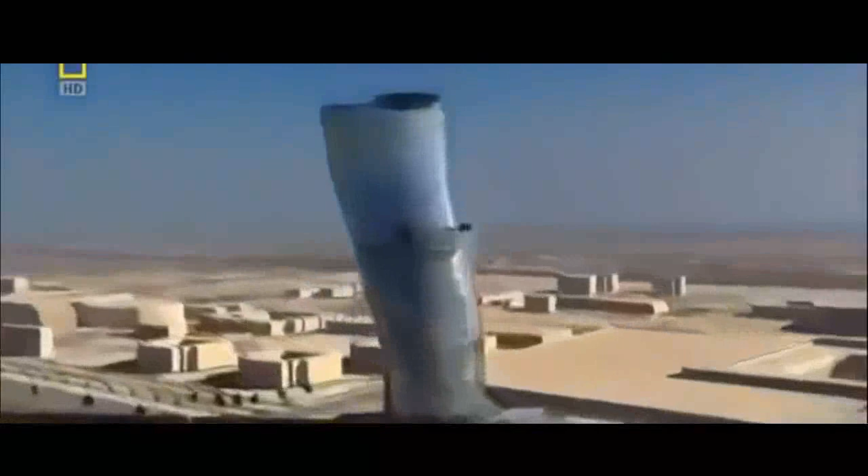To make it stand up, it'll take some extraordinary engineering that could rewrite the skyscraper rulebook.

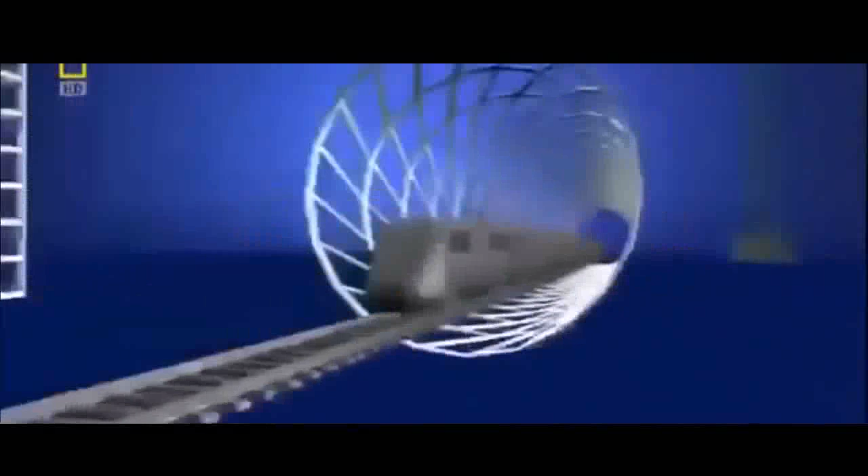Situated on the edge of the Persian Gulf lies the Sheikhdom of Abu Dhabi. It's the largest and richest of 7 states that unified in 1971 to form the United Arab Emirates. Abu Dhabi is undergoing one of the biggest makeovers of modern times.

Its ruler, Sheikh Khalifa bin Zayed Al Nahyan, wants to join the City Super League. And he's spending over $200 billion to transform his capital into a world-class business and tourist destination.

He's already spent a reputed $3 billion creating the most expensive hotel ever built. The Emirates Palace boasts 114 gold domes and is the height of luxury, where rooms cost up to $12,000 a night.

And that's not all. He's built one of the largest and most opulent mosques on Earth. Capable of accommodating 40,000 worshippers, the Grand Mosque boasts the largest carpet on the planet and the world's biggest gem-encrusted chandelier. But even these structures have not quenched his thirst for the extraordinary.

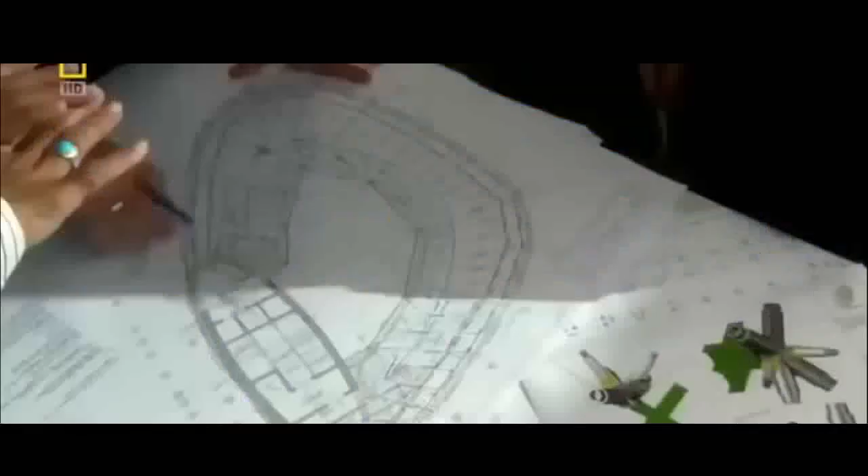It's a tough challenge. This is a land where extreme engineering is the norm. Neighboring Emirate Dubai has already built the world's tallest skyscraper, the 828-meter-high Burj Khalifa, and an iconic luxury hotel, the Burj Al Arab. Sheikh Khalifa signs up a team of architects and gives them a clear brief, not to go bigger or taller, but to challenge the rules of architecture.

For Neil van der Veen, one of the concept architects, it's a unique opportunity. The spirit of the times in the UAE was that anything was possible. Really, you could do anything. We can do something in the architecture that will represent that Abu Dhabi is right at the cutting edge.

The architects look for inspiration in Abu Dhabi's landscape. They find it in the windswept dunes and the rolling waves of the Persian Gulf. We took this idea of wind and water, which are both dynamic, fluid type of rhythms of nature, and we said, how can we capture those in time?

As a result, you get a much smoother facade. I was really very happy when we first saw it, because with such a building, you can get the first impression from the first few seconds.

The team come up with an extraordinary design. A tower that spirals out of the ground to 160 meters. Inspired by a desert whirlwind and the splash of a wave rising over the sand. This gravity-defying skyscraper tilts almost 5 times more than Italy's Leaning Tower of Pisa. No single angle of this tower is the same as another. It's a structure guaranteed to amaze.

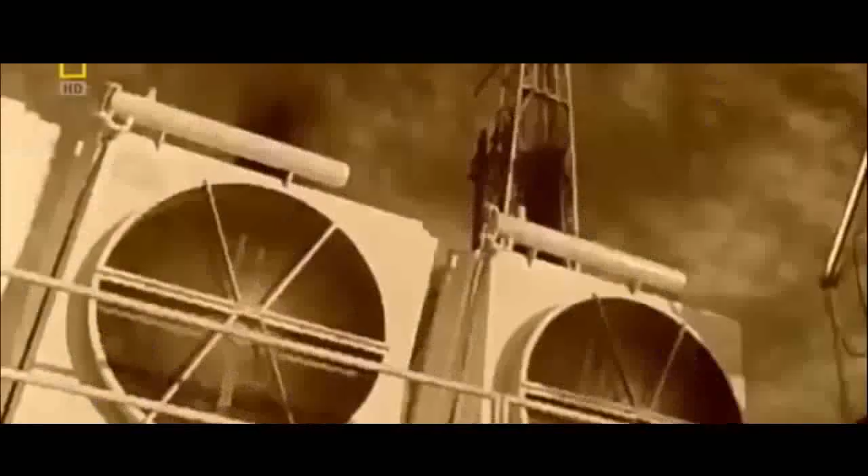Over the past 50 years, this land has experienced extreme change like no other. The discovery of huge oil reserves in 1958 set the wheels of progress in motion. Abu Dhabi's ruler, Sheikh Zayed, had a vision to unify the sheikhdoms and secure their financial future from Western dominance. He then set about using his black gold to create a city that rose out of the desert.

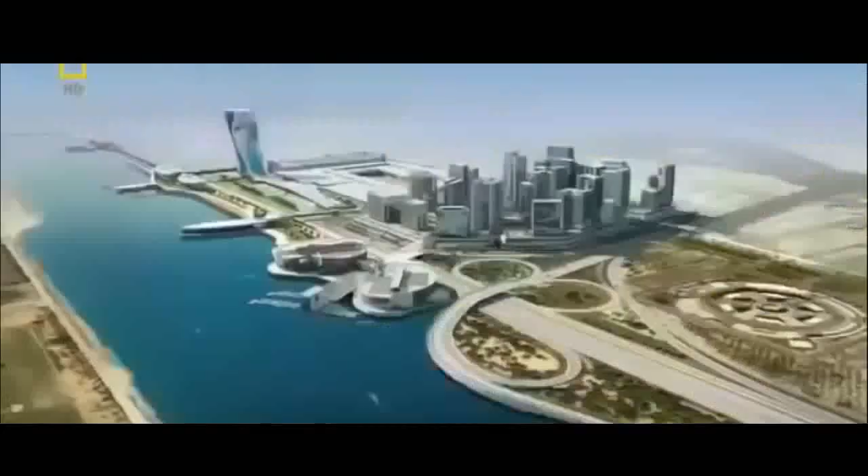Today, Zayed's legacy is all around, and now his son wants to leave one of his own. To transform Abu Dhabi once again, but this time to put it on the world map. Sheikh Khalifa plans a new $2 billion business district called the Capital Centre. Situated alongside the Middle East's largest business hub, the Abu Dhabi National Exhibition Centre. It's the ideal location for an architectural icon, and inspired by its location, the new tower is named Capital Gate.

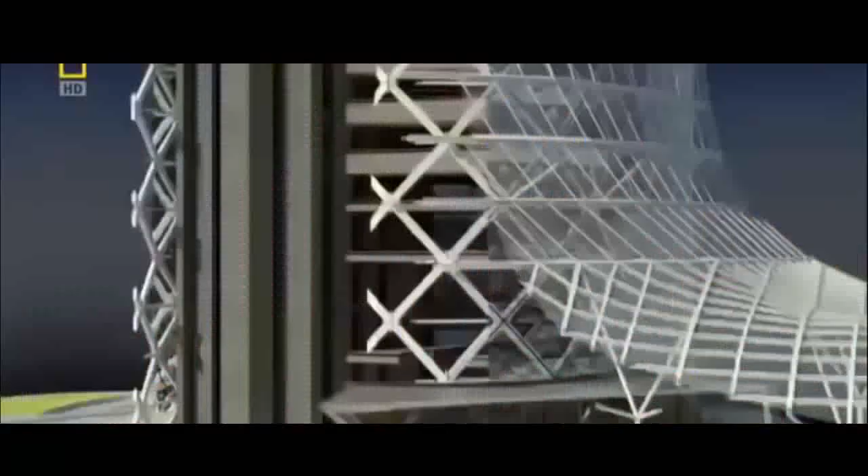Now, the idea must make the leap from the drawing board to the construction site. The only problem is, no one has ever attempted a skyscraper like this before. Everyone realized that this is a crazy structure to build, and how are we going to build it? To make Capital Gate's gravity-defying design a reality, it'll take some extraordinary engineering, and the challenge begins on day one. Its top floors overhang its base by 33 meters, creating huge forces that want to rip the building's foundations out of the ground.

At the construction site, project architect Tony Archibald is daunted by the task ahead. When I first joined the job, I was shown the drawings, and I kind of did a double take, and I wasn't quite sure that I got the correct understanding of the project, and it took me a few moments before I realized what we were about to undertake.

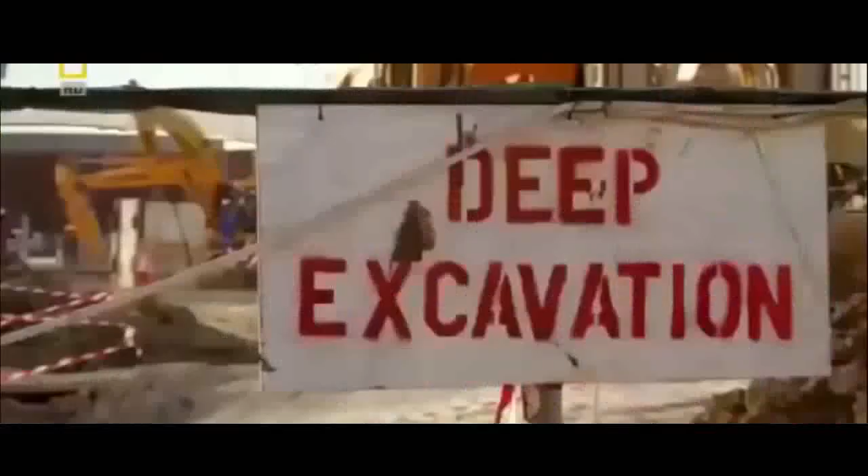Keeping Capital Gate upright is a huge engineering challenge. There isn't just one solution. To overcome the forces of gravity, it will take a whole range of pioneering techniques. But the task starts with the foundations deep underground. On one side of the building, the weight is going down into the ground. On the other side, it's being lifted out of the ground. And that's due to the large overhang that we're having to deal with.

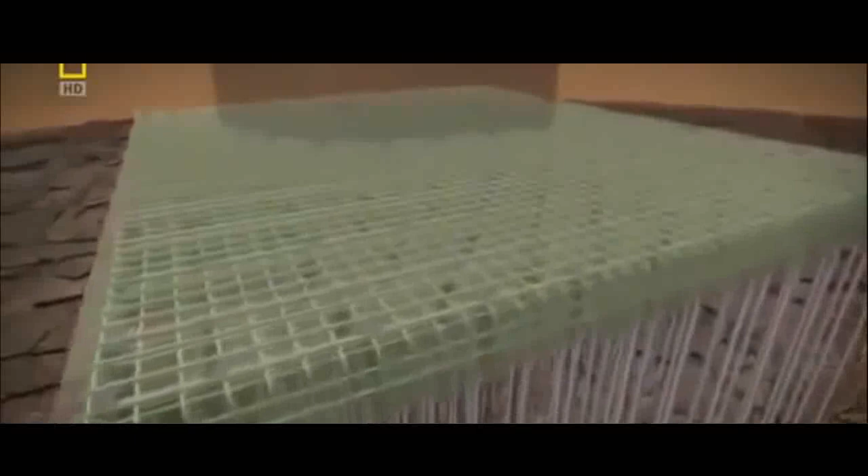The solution requires almost 400 concrete piles that work in 2 different ways. On the leaning side, half of the piles push the overhang's forces into the ground. On the opposite side, the remaining piles anchor deeper into the bedrock. They resist the stretching forces trying to wrench the building out of the ground. Finally, to evenly distribute Capital Gate's forces into the piles, a deep concrete slab reinforced with steel is laid on top. What the foundations taught us is that every single aspect of this building has to be custom engineered.

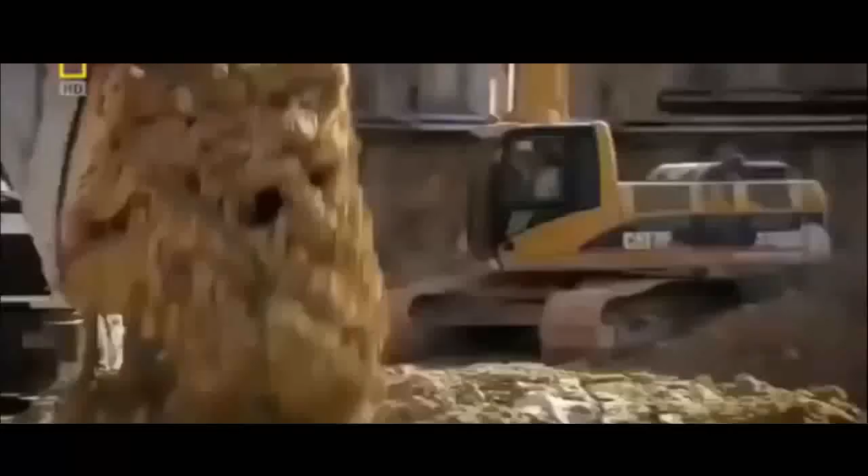Excavators dig out a colossal 6,000 cubic meters of sand. And over 8 weeks, hundreds of piles are driven into the ground. We had an awful lot of piles to put in a very close proximity. It was a real difficult challenge. There can be no let-up on this schedule. Sheikh Sultan wants Capital Gate complete by an impossibly tight deadline.

With the foundations finished, building above ground can begin. But because of the dramatic lean, it will have to be constructed in a very different way to a conventional skyscraper. We realized once we'd done the foundations that this was going to be the first of many difficult problems. A normal skyscraper requires a solid core to hold it upright. But Capital Gate's curves will just crack and topple a standard core. Engineers must discard conventional thinking and devise a way to defy gravity.

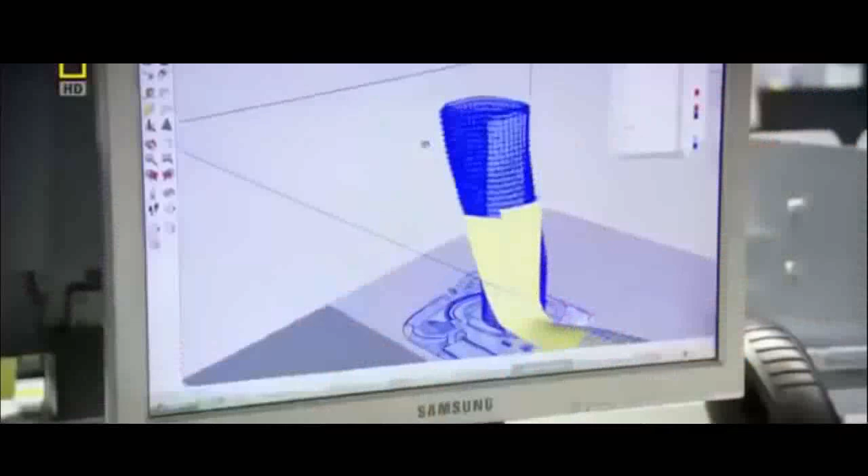Inspired by the nearby desert landscape and its wind-shaped dunes, architects have designed a curved leaning tower. But it'll take some audacious engineering to stop Capital Gate from falling over. Normal skyscrapers are built around a slim vertical core, which helps to channel the building's weight into the ground. There's so much overhang on this building that a conventional core was no way going to work. You just can't build a straight core. It's just not strong enough. Capital Gate's design would cause a conventional core to bend dangerously. The pull of the massive overhang wants to stretch the core on one side, causing the concrete to tear apart.

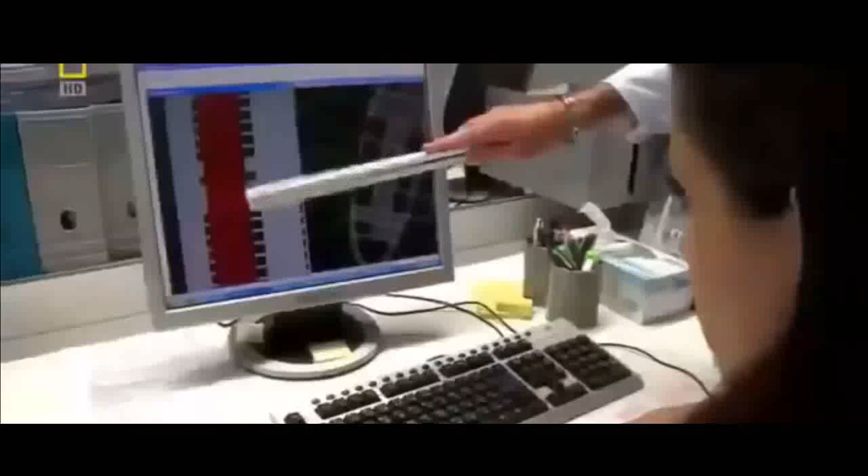Structural engineer Mona Vasi knows it's a serious problem that must be solved. When I saw this one, I thought it's impossible, it's not going to work. It's just some sketch, somebody left it somewhere. But I always think that for the architects, it's easier for them to just draw something, but it's not easy for us to fulfill or satisfy their need.

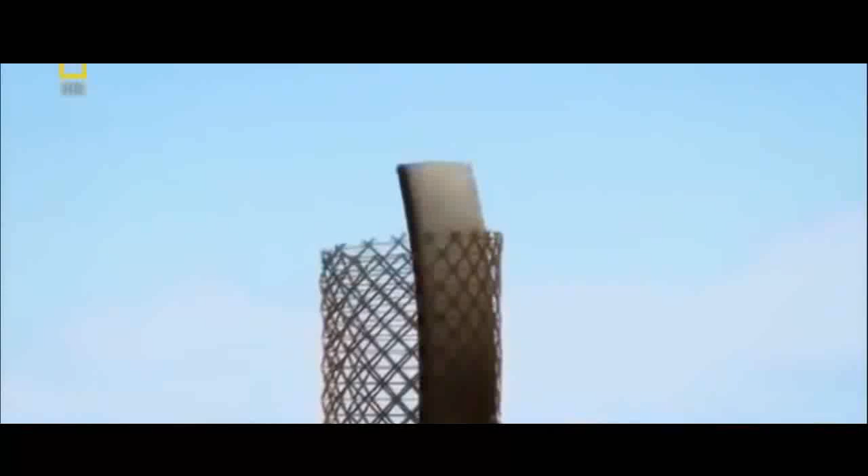The engineers developed two groundbreaking solutions. The first part of their plan is to build the core with a curve, bending in the opposite direction to the building's lean. As the structure grows, its weight pulls the core straight. In total, it shifts 350 millimeters, and the effect is significant. The concrete that would have been stretched by the overhang's pull will now be compressed and strengthened. You build it bent, and then as you add the slabs to the upper levels, it pulls it back into vertical. So basically that whole vertical core is in compression, and that gives it immense strength.

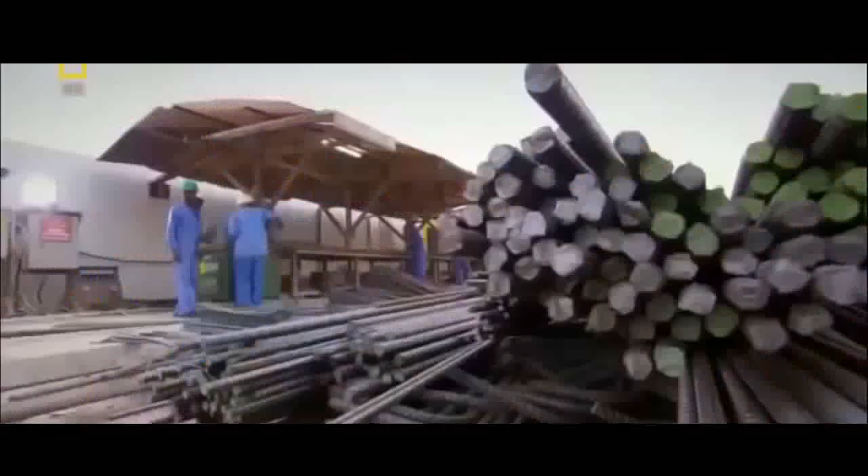The core grows 4 meters a week, and construction manager Les Fairchild is in charge of building it. This is probably the most complex core that I've come across. It's built at an angle, and effectively the core holds the whole building up. The core is built using a technique called jump forming.

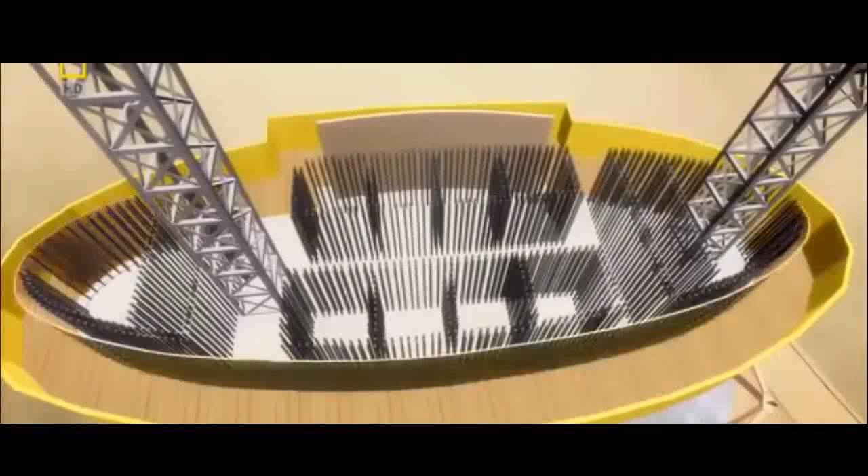First, a dense mesh of steel reinforcement is assembled. A mold then closes around the steel to form the shape of the core. The steel mesh is then filled with concrete. Then the mold or form can climb up the core wall for the process to start all over again. Jump form is a hydraulic platform. Once we've cast each 4-metre level, we simply attach it to some runners and we jump it hydraulically up to the next level.

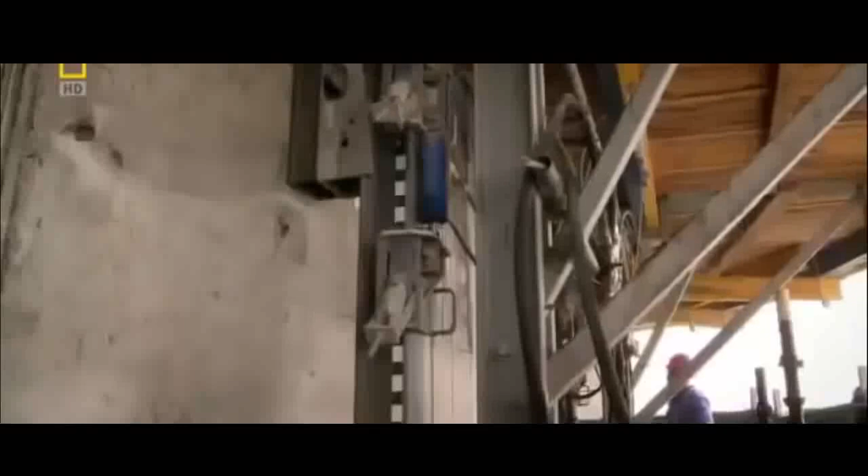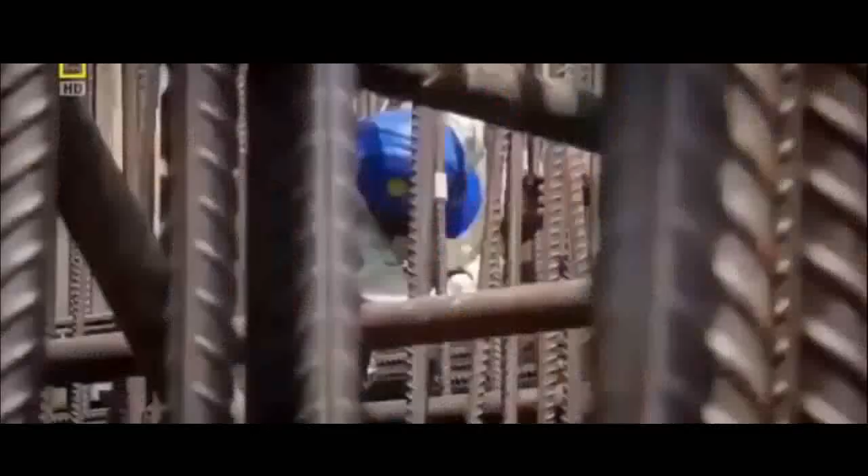The core will be strengthened as it straightens. But for the core to carry extreme loads, the concrete must be reinforced using steel rods called rebar. The rebar is installed during the daytime, but temperatures of up to 50 degrees Celsius and concrete don't mix. It dries too fast and could crack. To set at the right speed, the concrete has to be poured during the cool of the night.

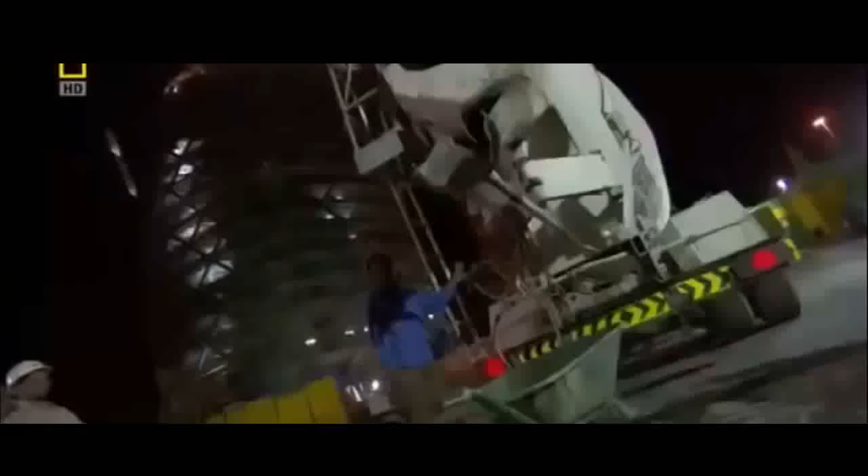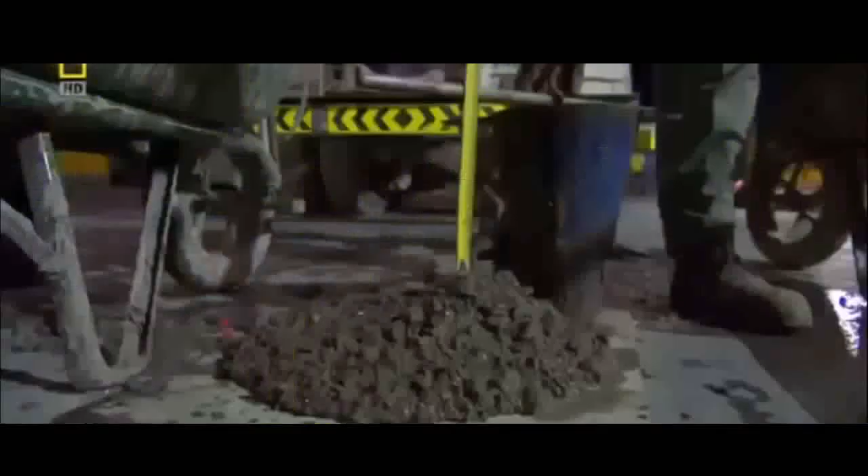As the core grows higher, the liquid concrete has to be pumped over longer and longer distances. So the consistency of every batch is first checked in a slump test to ensure it won't block the pipes. When you first see it coming out the wagon, you can usually tell whether it's a tight mix or a loose mix, and that's what we're testing for really in the slump test. We simply make a cone, lift the cone off, and depending on how much it reduces in height, tells you exactly what the slump is. The one we just witnessed is 215 millimetres, which is within the specification, so that's good to go.

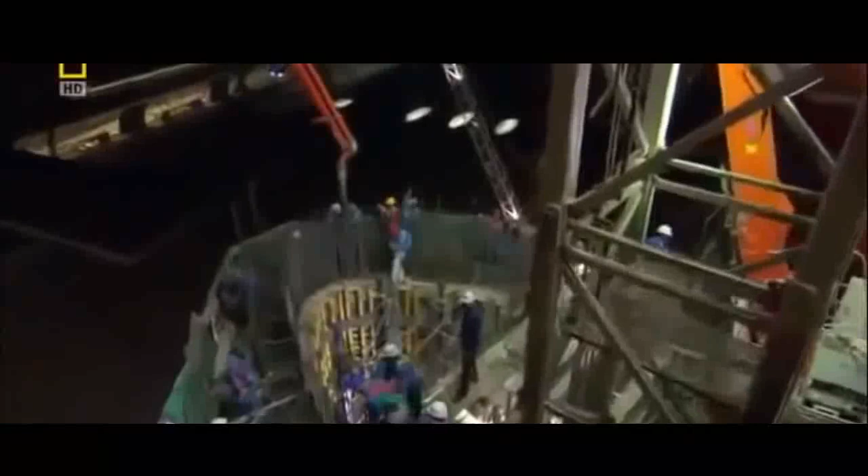Whilst the truck drives to the pump, Fairchild needs to get onto the core. He can take the stairs, but 90 metres up is a long climb. He knows a much faster way. Crane lift. It's going fairly well. We've had a nice continuous supply of concrete, and we're now pumping it up to the upper levels of the building. And the lads are just steadily working away. They actually work from one side to the other in metre deep layers, so they're doing everything right. It's always exciting when we pour concrete. It means it's another achievement really. We're going up another level.

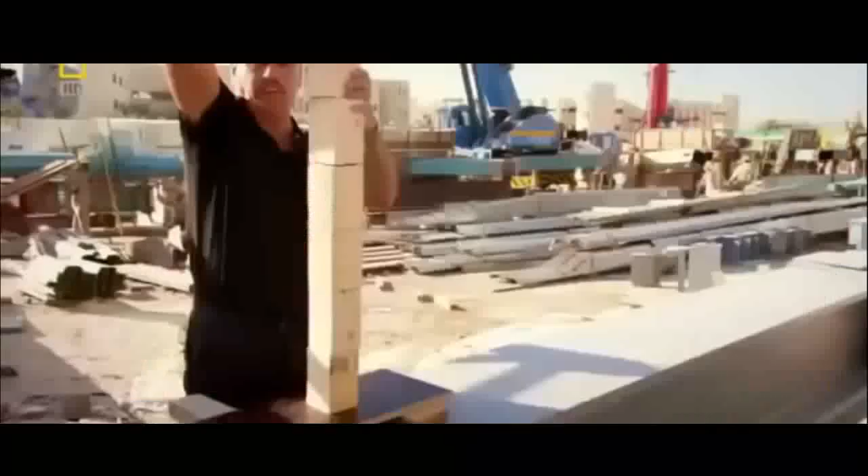But building the core out of alignment and packing it with rebar still isn't enough to stop gravity toppling Capital Gate. What we came up with is a post-tensioning solution where we introduced much more reinforcement into the core wall and then used the tensioning process. Basically that was done by introducing high tensile strands to the centre of the walls. When we reach the designated height, we simply apply tension. We're actually stretching the tendons that fall through the wall and pulling them tight, and that's done by a tensioning machine. So effectively, when the tension is complete and the load was applied, the core would stay intact, and the additional reinforcement would prevent it from falling over.

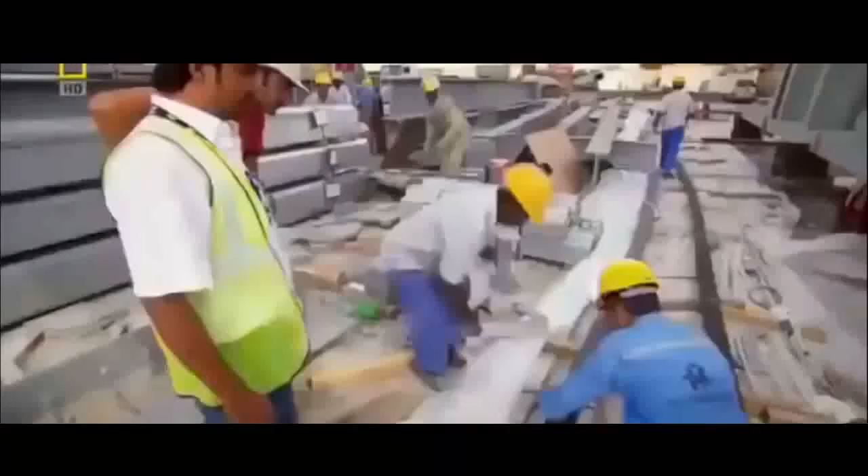To post-tension the core, 146 steel tendons are threaded vertically through the concrete. Each tendon is 20 metres long and runs through 5 floors of the building, overlapping each other for maximum strength. When the tendons are stretched, the stress counteracts the pulling force created by the massive overhang, stopping the concrete from tearing apart. On site, the team are post-tensioning the core. But no one has ever attempted this vertically in a skyscraper.

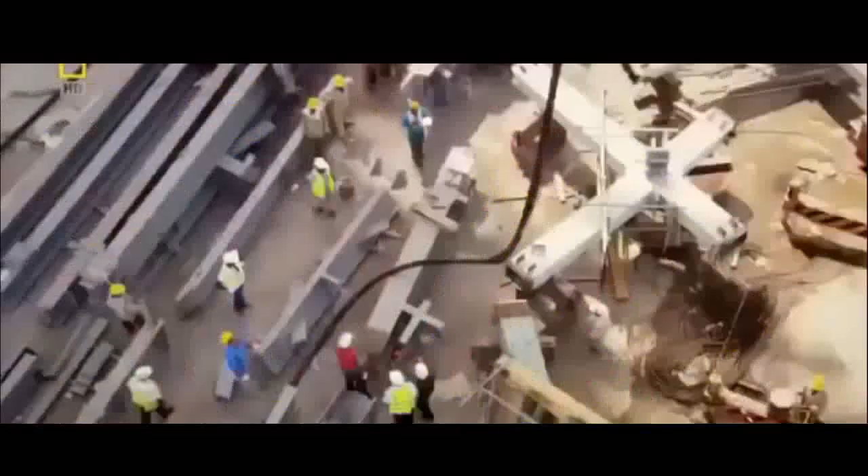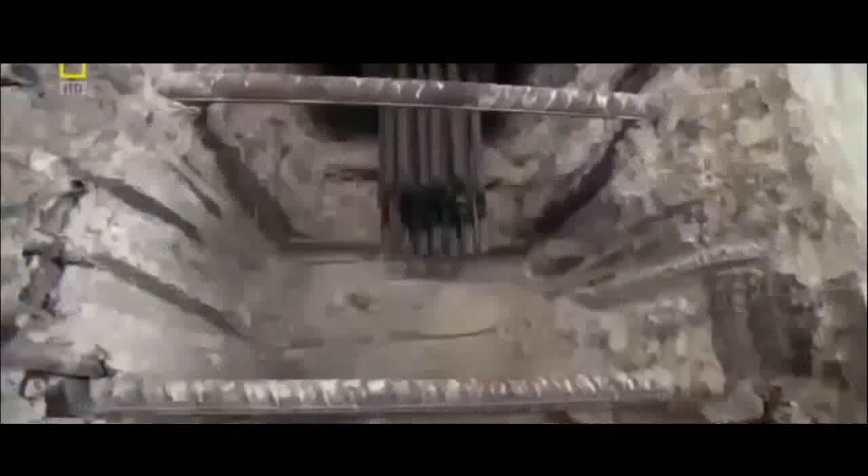The long tendon is lifted to the top of the core. The team used the steel tendon's weight to force it through a duct already cast through the core. Once the tendon is in position, the team lock off both ends, ready to tension its individual strands. A pneumatic jack clamps around one strand at a time and stretches it. It's equivalent to about 5 family cars pulling on one end of the rope. With the steel tendon now stretched to the right stress level, concrete pouring can continue upwards.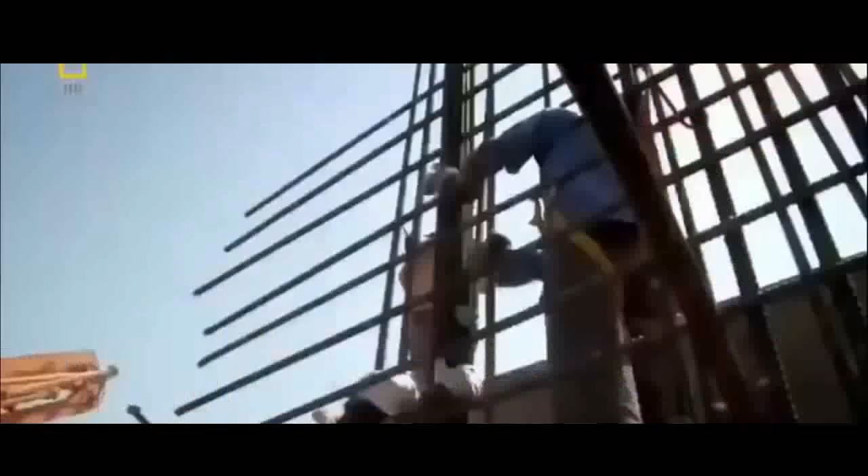The quantity of cable that's been used is approximately 120 tons and 120,000 metres in length. It's about 44 times the Golden Gate Bridge. This process is repeated over and over and means the core should withstand the huge loads generated by Capital Gate's extreme overhang.

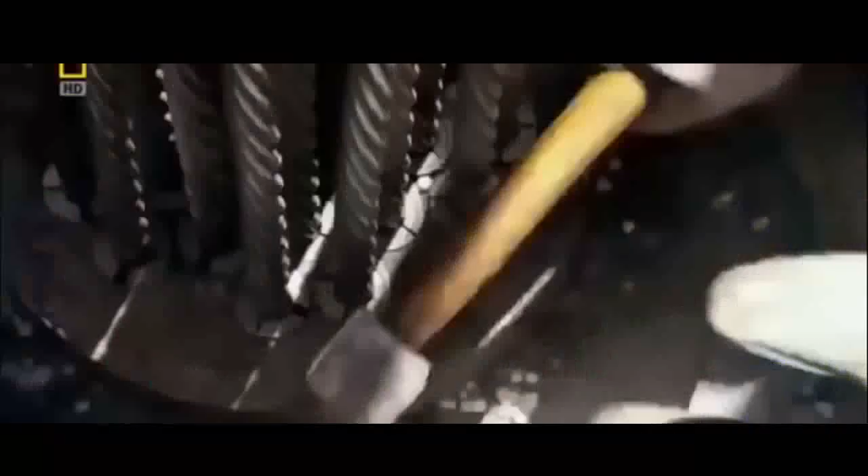But now, an even greater challenge must be tackled. The building's twisting, leaning design must somehow be turned from theory into reality. And once again, it'll mean bending the rules of architecture.

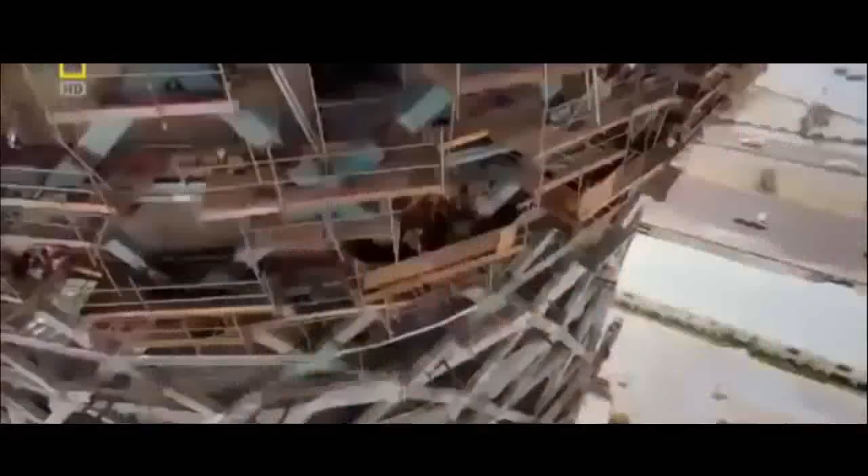To create Abu Dhabi's architectural icon, Capital Gate needs an exterior curved leaning frame. But once again, the building's extreme tilt creates a problem. The shape of the building with this very pronounced overhang meant that traditional skyscraper building solutions just weren't going to work. There was no way. The building design requires it to be thin to maximize floor space and allow for huge panoramic windows.

Irfan Ahmed is one of the engineers who has to find a solution. For structural engineers, it's always challenging to accept the architectural requirement, you know. They always want thinner and thinner and thinner. Surprisingly, the humble chicken could help with this engineering dilemma. It is essentially a skin of structure around the outside of the building, not unlike an egg.

An egg can withstand huge loads because it evenly distributes forces down through its shell, which means the shell can be thin, creating more space inside. So it's very, very thin, it's very, very strong. If I try to crush this egg, you can see that it's actually amazingly resilient. So let's see how resilient.

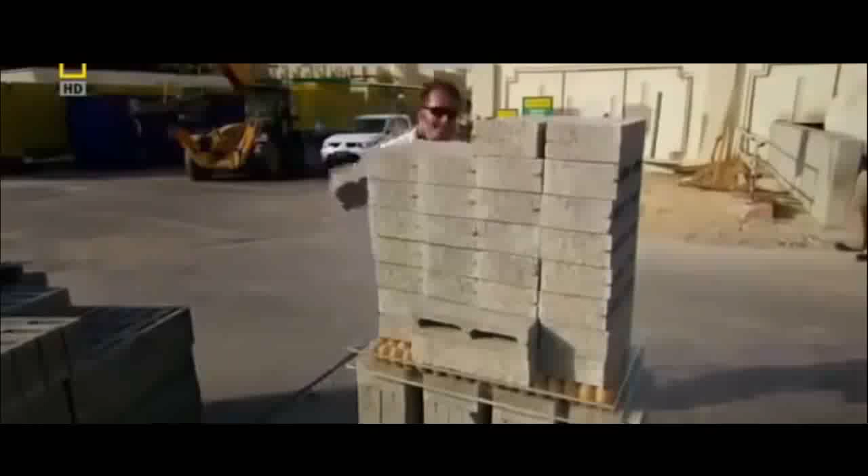That's 30 blocks, and I think it's about to go. It's going big time now. This is it. This is the end. No! These eggs eventually crack under the weight, but they withstood over 450 kilos, half the weight of a family car. Yeah, we used to have it all around the floor.

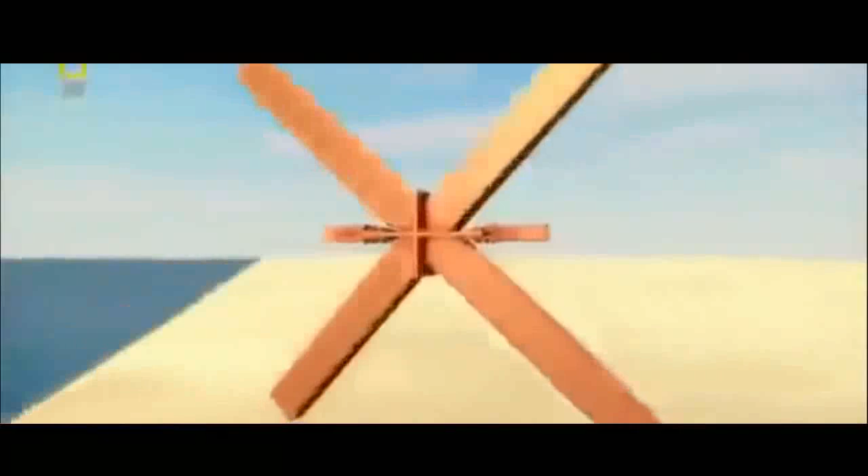Capital Gate can't channel forces with eggshell, but it can use the principle of how it works, using a diagrid. A diagrid is a giant mesh of steel that wraps around the core. Steel beams connect to a node or joint to form a cruciform section. 720 uniquely shaped sections link together to form the thin but immensely strong diagrid.

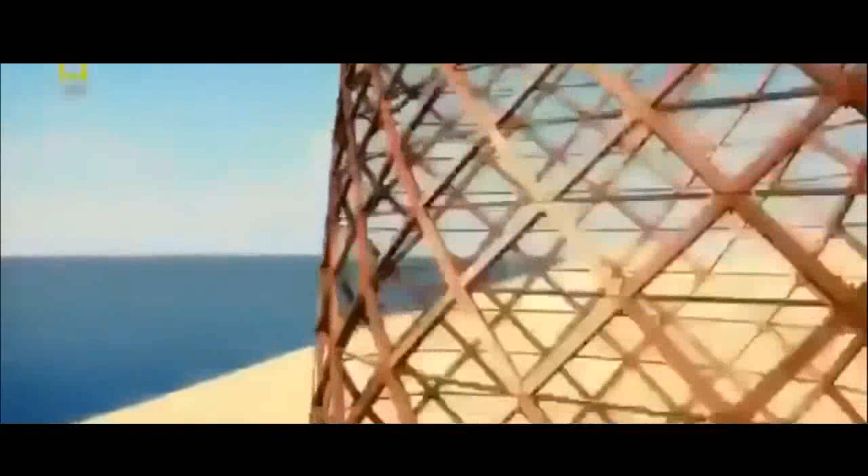Working together, these cruciforms equally distribute the forces down the outside of the building. The way it does that is by making a uniform net, so that the forces are very evenly distributed. And that means that we can get away with slenderer sections. On site, a team of 240 steel fabricators assemble the diagrid.

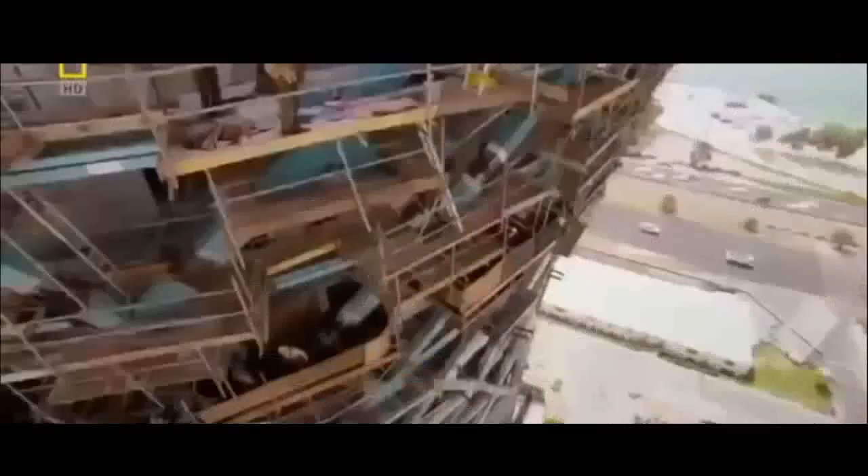They've built the easier straight part of Capital Gate's base, but now the structure is starting to lean, making installation even more challenging. Each cruciform, weighing up to 16 tons, has a unique geometry and must be crane lifted at a precise angle. If the diagrid is not assembled with millimeter accuracy, the mesh will not channel the loads and the structure could be weakened.

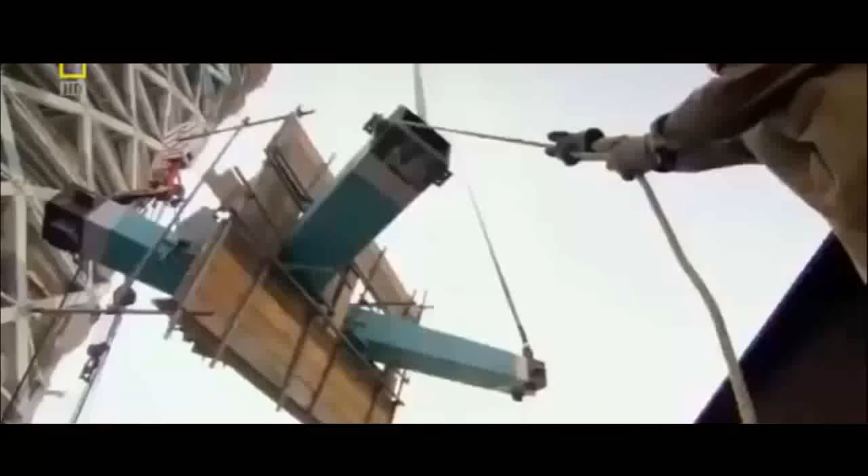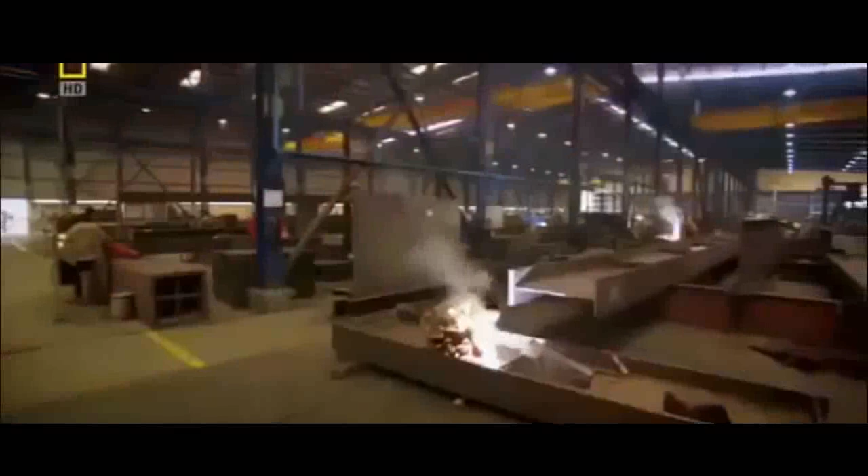The engineers must communicate closely with the expert steel fabricators. They design and manufacture the diagrid 150 kilometers away in the neighboring emirate, Sharjah. Here, cutting-edge construction is the norm. They've built one of Malaysia's Petronas Towers and Dubai's iconic skyscrapers, the Burj Al Arab and the Burj Khalifa. But Capital Gate's revolutionary design pushes even these experts to the limit.

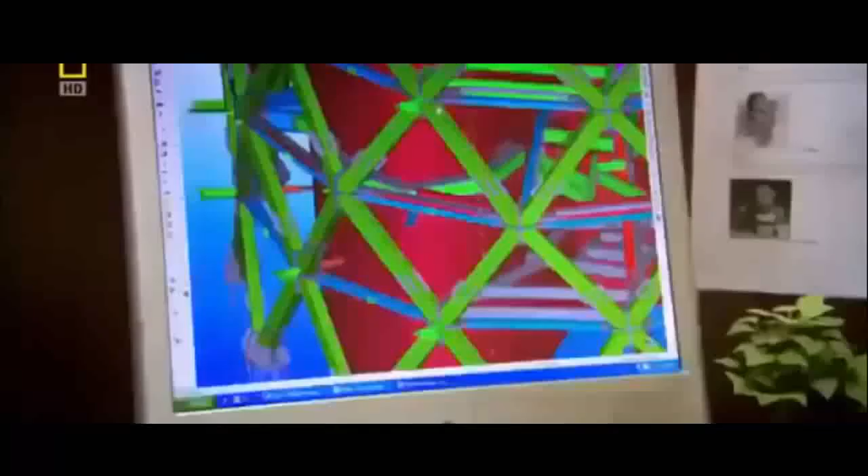On the planning floor, project engineer P. Bhaskaran and his team need bespoke 3D software to tackle the building's highly complex diagrid. The 3D modeling is done, and any unforeseen criticalities will be very clearly identified in the 3D model. Each one of the 720 cruciforms is precision engineered, not only to channel huge forces, but to connect with millimeter accuracy to the neighboring cruciforms and the glass facade.

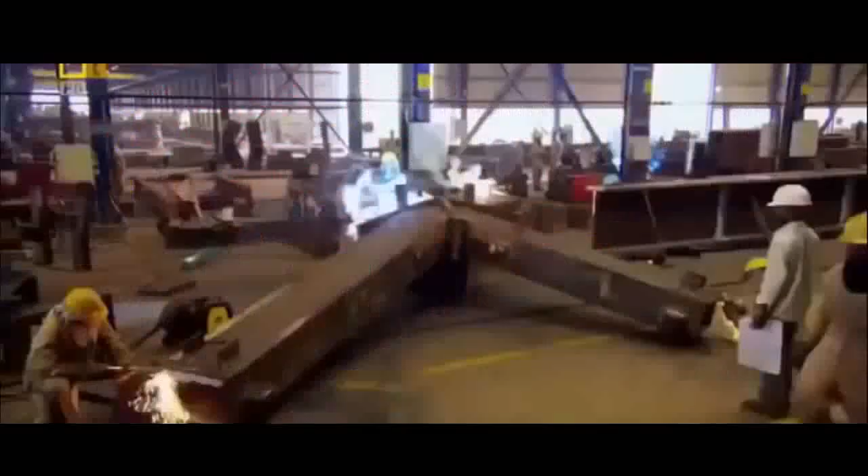But to measure their exact angles, the team used some old-school technology: chalk. It might look unsophisticated, but it's highly accurate, ensuring all the elements will join together. To keep up with construction, the factory must produce 18 cruciforms every week. Constructing such a huge building, a critical building, within the short span without working 24 hours, it is absolutely not going to happen. As the skyscraper reaches new heights, the long hours start to pay off.

This design pushes the diagrid technology to its absolute limit, and in fact far beyond what's ever been achieved so far. Even in your dreams, you're thinking about this project. So once you see the structure coming up, you forget all the long hours you spend and all the sleepless nights.

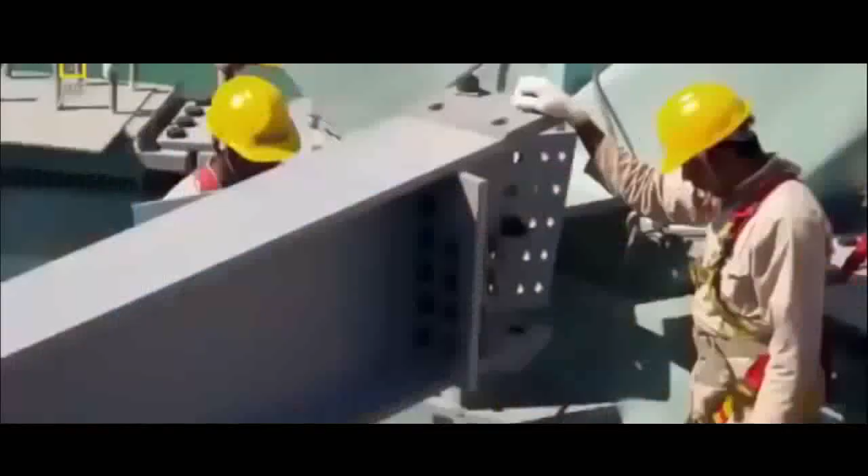A colossus is fast emerging from the Abu Dhabi sands. Now, this leaning tower must be clad with a glass facade. And as always with this gravity-defying structure, it's going to require some revolutionary engineering.

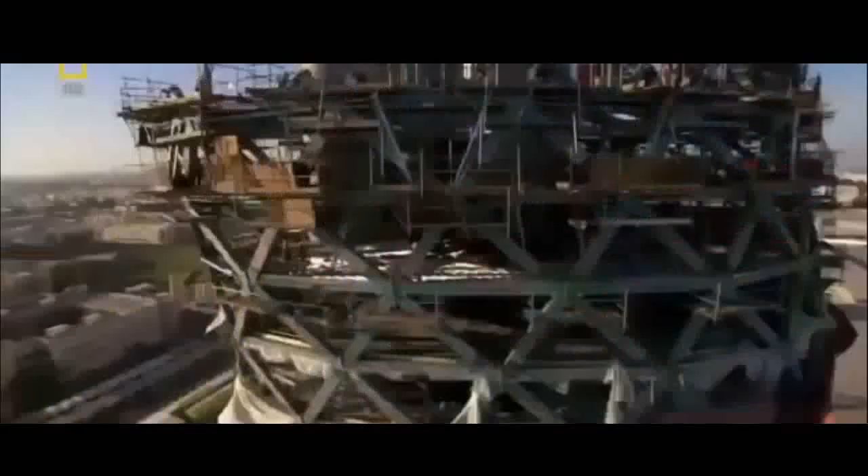Glazing Capital Gate's leaning curved frame is a major problem. Covering its unusual contours with curved glass will blow the budget. So the skyscraper's curves must somehow be clad using cost-effective flat glass panes. Fortunately, ancient Greek geometry can help.

Because you've got a complex shape, it's an organic shape, it's a curved shape, the only way to model that with straight lines is to use triangles. Triangular panes can pivot in 3 directions, and when joined together can cover complex geometric surfaces. But because every angle of the building is unique, it'll take 26,000 triangular panes to form the facade.

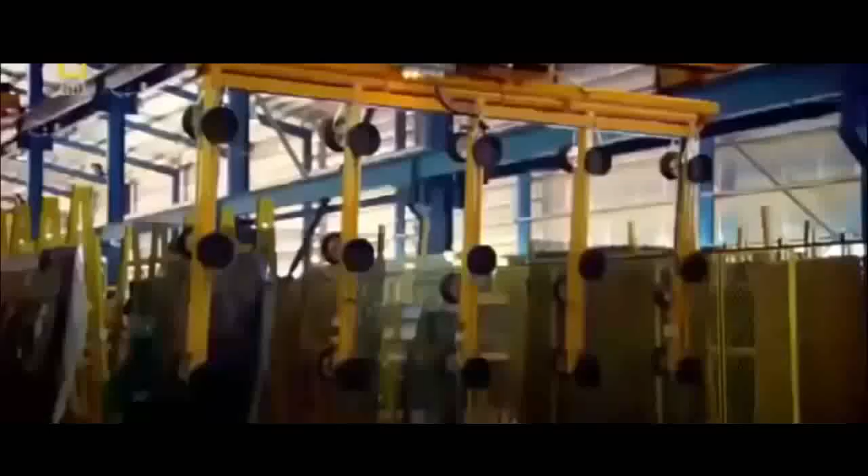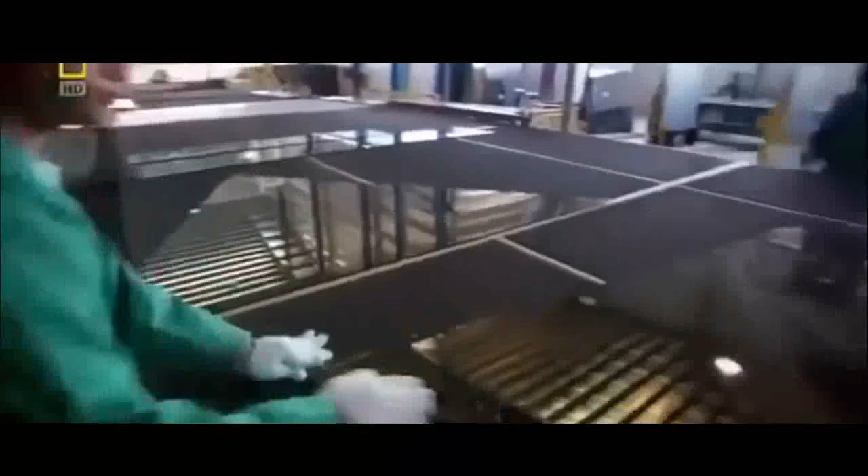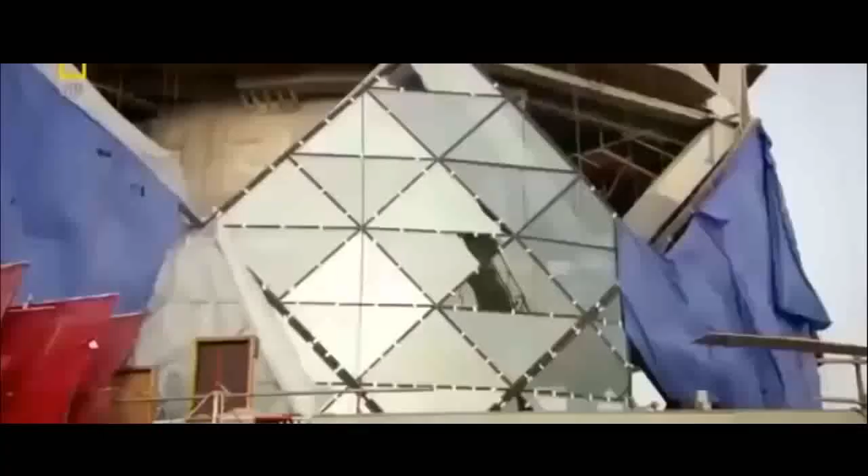With so many glass triangles to cut, the local glass factory springs into action. Each pane is scored by an automated diamond cutter to an exact pattern. The triangles are then sent along the production line. The team is under constant pressure to deliver enough glass to the site. Hey, this side, guys, hold it. After several weeks, 8 diamonds are in place and another 100 standing by.

But the glass design is so unconventional, it still has to pass a number of tests to prove it's up to the job. Because we'd already started the glass installation, the results of this test were absolutely key. Each panel is stacked one upon the other. So if we'd had any kind of problem, we would have had to unstack them, which would have had disastrous consequences for the program.

This is no ordinary glass skin after all. Capital Gate's core straightens as it grows. The skyscraper will not stop moving until after completion. Normal glass facades can accommodate minute movements caused by wind and temperature changes. But to stop the glass shattering and keep the building watertight, the panels must be designed to shift by up to 20 millimeters. The scale of that kind of movement is almost unheard of in glazing systems. It's a vast amount of movement.

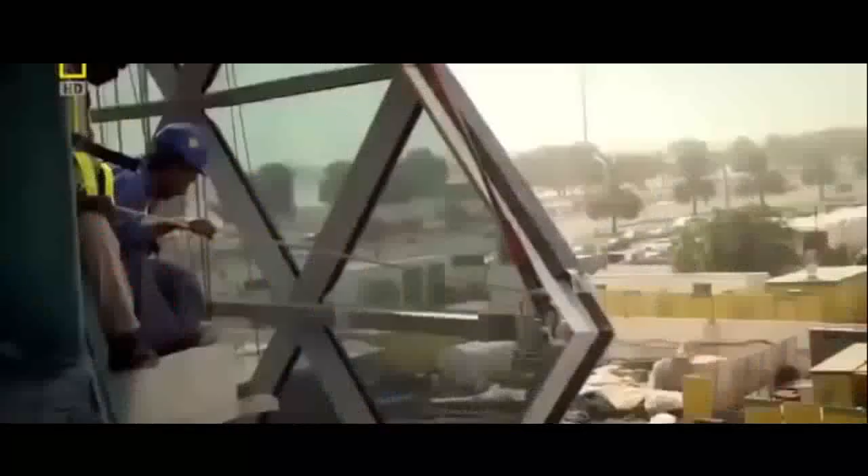With glass installation ongoing, construction manager Craig Rooney needs to know the panels will perform. We don't want to get to the top, we've done it, we've installed it, we think we've done a great job in it all. The panels must be tested to the limit at a Dubai laboratory. A plane engine and many litres of water simulate worst-case scenario weather.

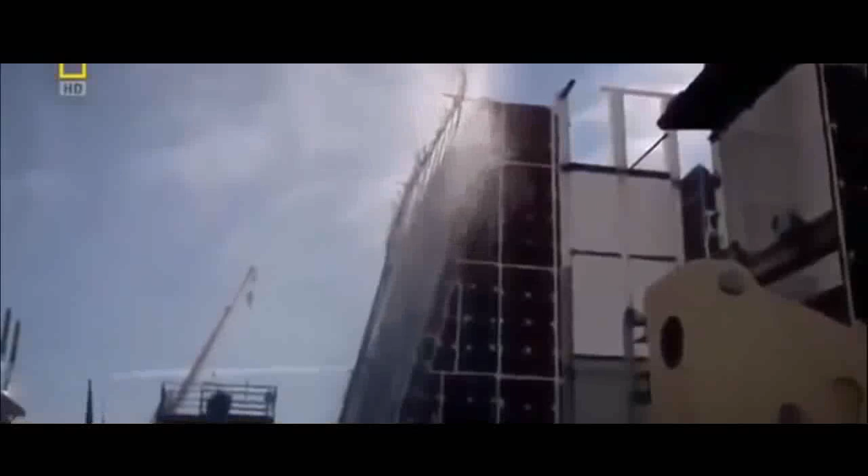Now the moment of truth. Any leaks could be a disaster. And it's bad news. The first time we got a full water test, we had a leak. The fact that we had a leak was devastating to the whole team and very alarming. The diamonds connect to each other by a bespoke two-layer seal. The flexible spongy seal allows the diamonds to move and keeps water out. But if any water does seep through the outer seal, drainage tubes fitted at intervals let the water flow away.

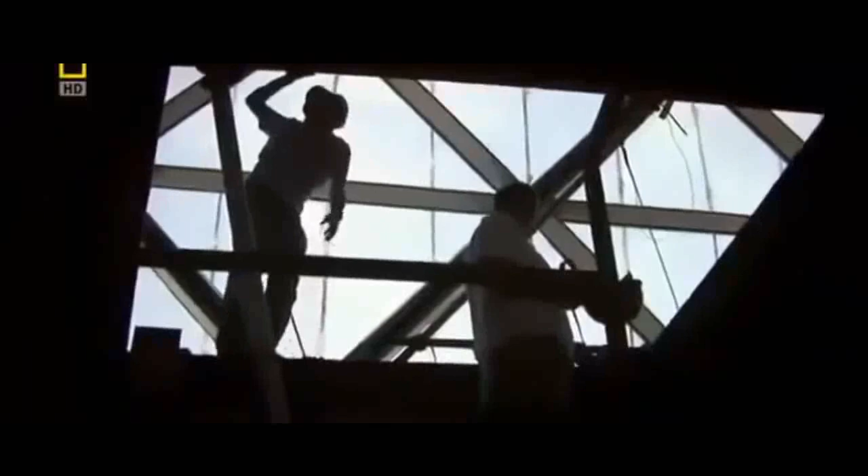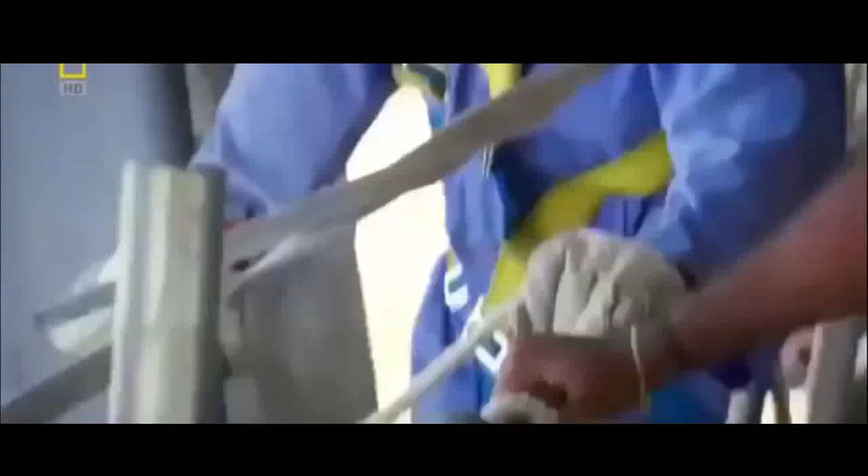The panel has failed the test. Water has flooded inside and penetrated the inner seal. If it was a fundamental failure, we're back to the drawing board, so the cost and the budget and the programme all go completely out the window. The panel is examined. Answers are needed fast. Fortunately, it's not a design failure. They discover a drainage tube is only blocked with sand. The problem resolved, installation can step up a gear.

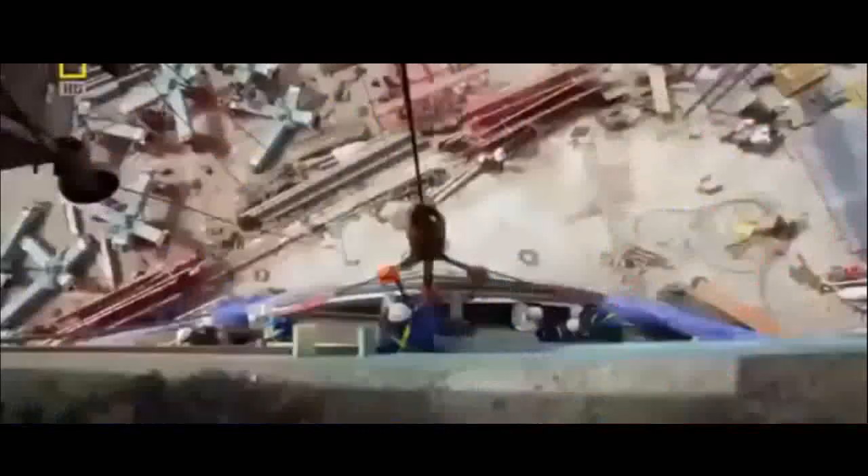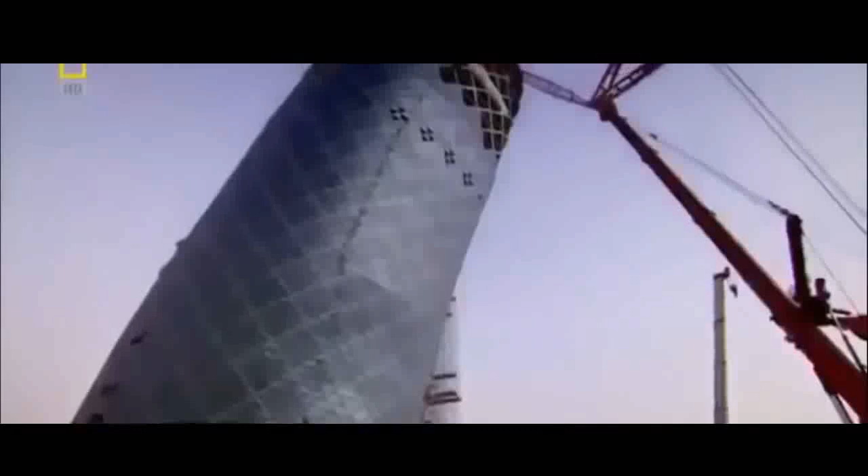But as always with this audacious building, one problem is solved and another is just around the corner. To give Capital Gate's five-star hotel lobby the wow factor, architects again plan to push the design to the extreme. Now they want to build an infinity pool and a restaurant, hanging 100 meters above the ground. 18 months into the build, Capital Gate's design is about to give a new slant on high-rise living. The architects want a pool deck and restaurant suspended in the sky, but it's an engineering headache.

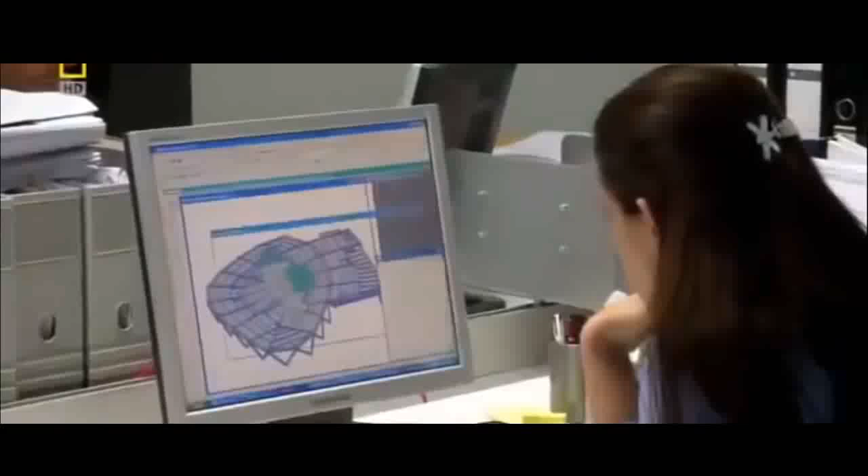There's so many requirements that architects have that really put us in so much trouble as engineers, but you want to make sure you have a safe structure. The design calls for a two-story extension, hanging without any visible support. But the pool's water alone will weigh 150 tons. The structure's huge mass means it needs reinforcement. We needed some supports from below, otherwise there was no other solution. I don't think you can have a cantilever that huge on this building, no way.

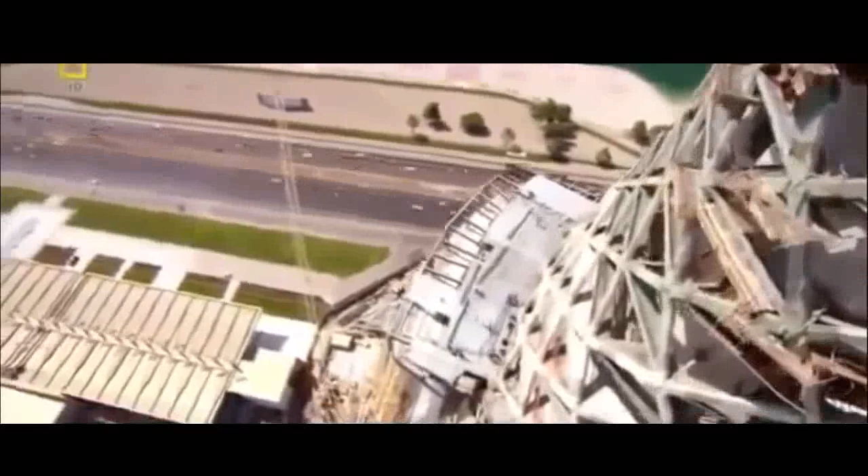The design will only work if it's underpinned with 22 steel struts. They will carry the loads back into the building. But the struts must also look delicate to meet the architect's aesthetic demands. On the construction site, 90 meters up, the pool and restaurant is taking shape. All of its structural elements are in position, except one. The team are raising its last 6-ton floor beam.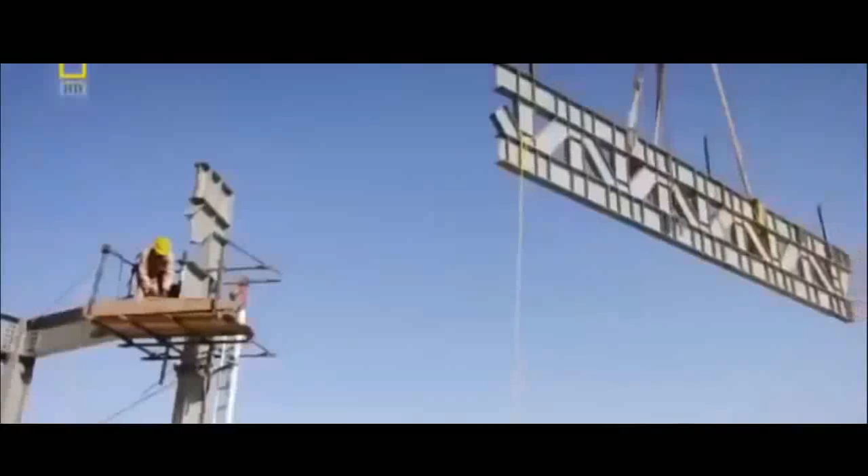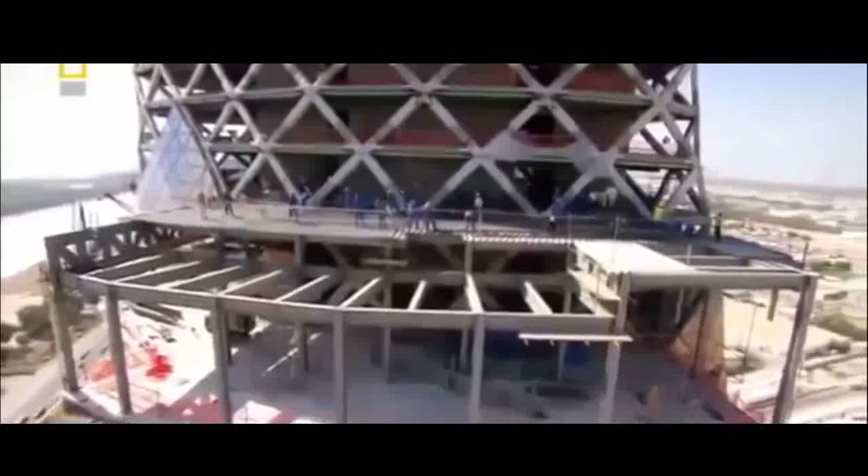It's taken many crane lifts, but one of the highest suspended swimming pools in the world has made the leap from blueprint to building. See all those lines that you just drew? They're actually drawing the same thing for you, but with a crane. But the feeling is indescribable. And the structure's muscular struts and connections are also elegant.

The idea behind these junctions is that they behave like the insects that can walk on water. They're sufficiently light that the surface tension keeps them above the water. So these little brackets dissipate the forces from all that weight.

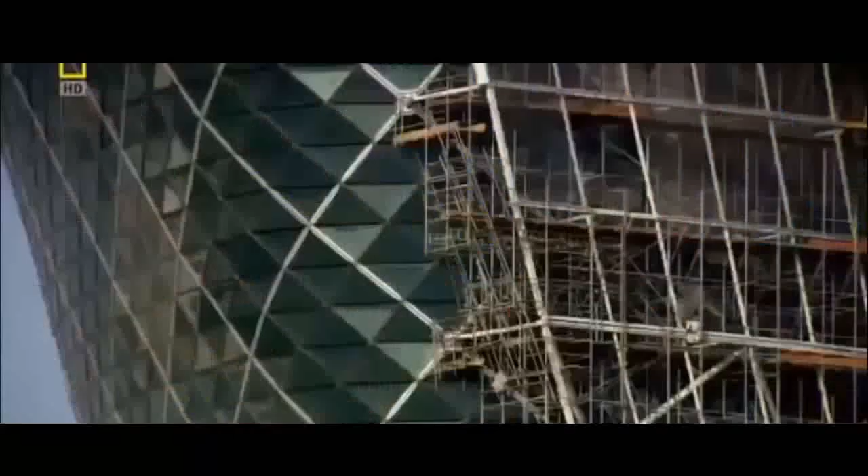Capital Gate is fast becoming an Abu Dhabi landmark. But the taller it gets, the more the weight of its upper floors is a problem. The skyscraper needs to go on a diet. And this time, the architects come up with a clever solution. The building has lots of visual surprises.

And one of the most important ones of those is the internal atrium. It's a kind of a light well that brings light from the sky deep inside the building, and it extends over half the height of the building. So it starts out very, very small at the bottom and opens out in a big funnel. This cavernous hole is good news for reducing weight and minimizes forces.

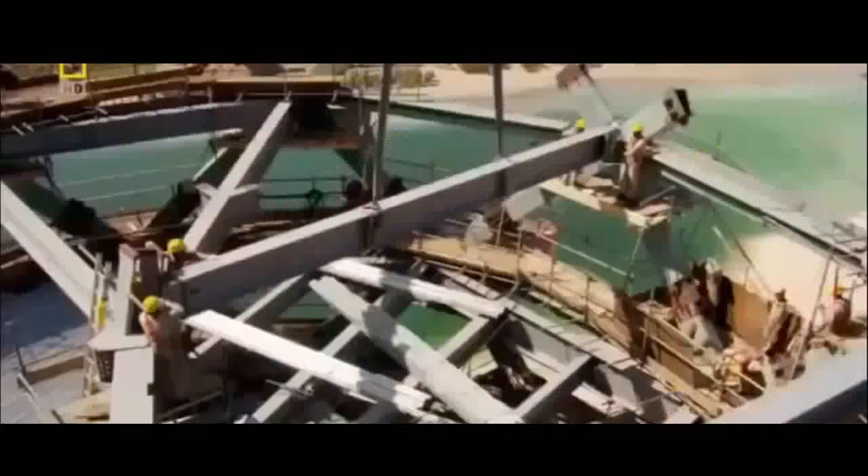But the atrium is a double-edged sword. The floors are critical in transferring loads from the diagrid to the core. A giant hole through 18 floors means these loads must find another pathway. It's a very, very big hole in every single floor plate. So our engineers really have their work cut out.

You don't want to have an opening in your floor. You want to have more concrete, reinforced concrete, to transfer these forces. The forces need to flow away. And the solution is pioneering. An internal web of steel mirroring the external diagrid. This is the first time we've ever heard of this being done.

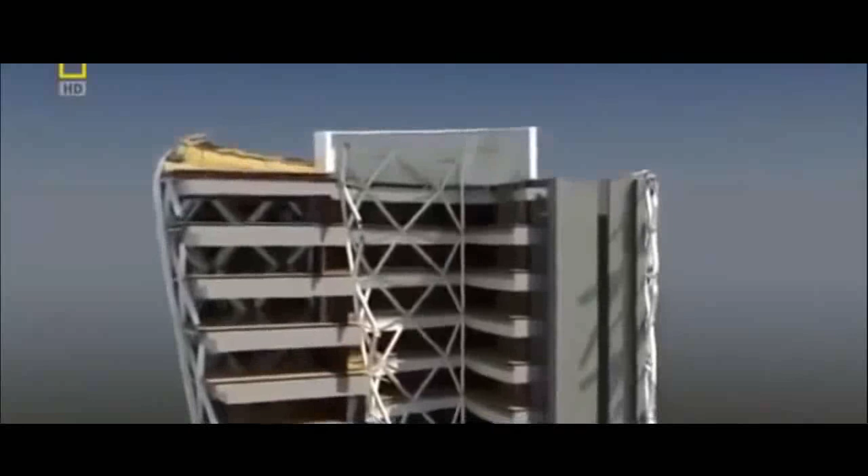The internal diagrid is actually a fundamental part of the structure. This funnel-shaped internal skeleton carries the forces of an 18-story building down to its tapered base and into the core. But the loads are extremely high for such a small area. To stop the atrium punching through the core wall, the concrete needs protection.

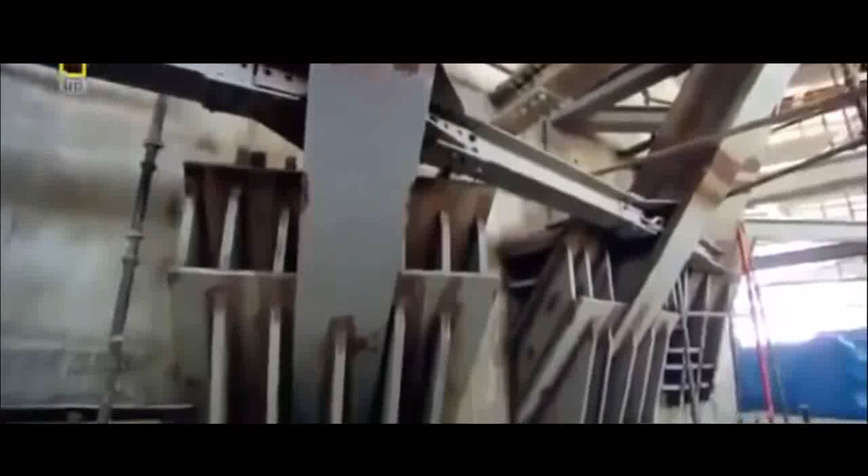The answer? 6 giant plates of steel that brace the connection to the core wall. The connections are really a wonderful, wonderful piece of engineering. They're 8 meters high. They span 2 floors, and they connect back into the core. The atrium's near completion brings Abu Dhabi one step closer to achieving an iconic landmark.

But as the sun goes down, this isn't the only celebration underway. On site, the Indian steel team are holding an annual blessing to the Hindu god Lord Vishwakarma, the protector of architects and engineers. Their livelihoods depend on staying safe, and although they use safety equipment and are highly skilled, working with huge sections of steel at height is never risk-free.

We pay our respect to God and get the blessings from the God. We do that for the safety of all our workers and for the proper completion of the job. Every trade of workers we take, the basic tools they are using on site, that has to be just kept in front of God, and the workers, they feel themselves that they are in safe hands. The tools are now blessed, and the steel team's morale is high.

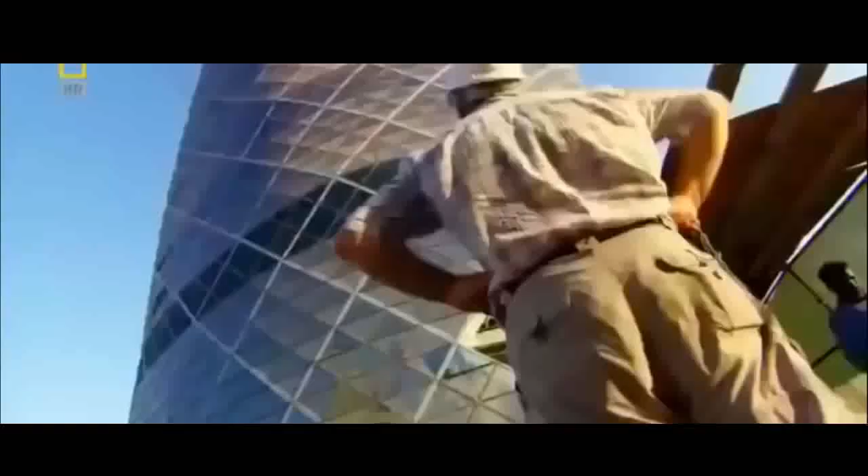But the glass installers, lifting diamonds to over a height of 100 meters, are getting the wrong kind of lift from Abu Dhabi's highly unpredictable wind. If the wind is too strong, then you can feel this in your hands when you hold these diamonds by rope. I always get nervous if I see the panel starting turning. And this makes me always a little bit afraid when I see diamonds going up and starting moving.

Meyer has to act quickly, or this 4-ton diamond could smash into the building. Not for the first time, lifting glass is delayed by changeable weather. At this rate, Meyer won't install the remaining 107 panels in time. But Abu Dhabi's wind isn't the only problem the Capital Gate team face. A last-minute design request comes in from the Sheikh's office that could have serious implications.

With just 6 months to go to completion, the Capital Gate team should be on the home straight. But those plans may have to be put on hold. I had a telephone call saying that we had to put a helipad on the roof, which I didn't think was a joke, but I was astounded that we got this at such a late point in the project.

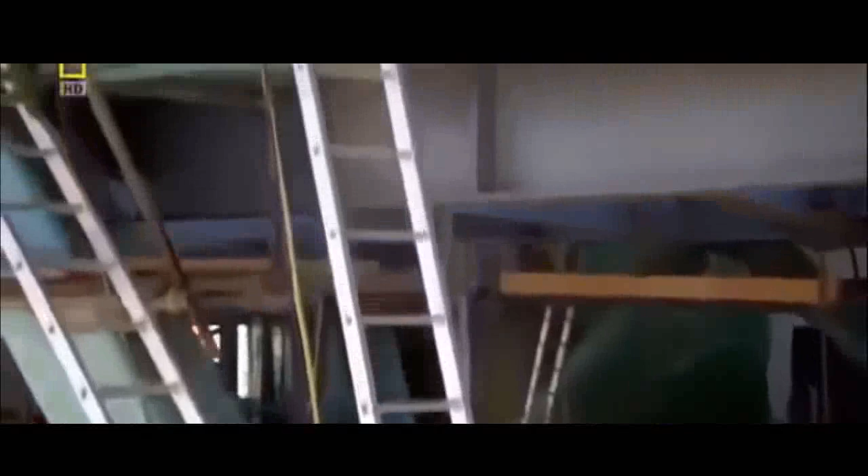Integrating what will be Abu Dhabi's highest helipad atop one of the world's most daring skyscrapers at first seems a simple request. But it actually poses 2 serious problems. It'll create new forces that must be absorbed by the already strained core, and unpredictable wind flows that can cause potentially lethal flying conditions. You get a thing called wind shear, tipping the whole helicopter onto its side, and this is a very real and very dangerous risk.

These rapid wind changes, known as wind shear, can affect the lift on helicopter blades. Aircraft can be blown off course, or literally fall out of the sky. There is no way that we could have any margin of error on the safety. The only way we could predict what the wind shear would be like on the top of the building was to model it in a wind tunnel.

In London, England, a scale model of Capital Gate is put through its paces in a high-tech wind tunnel. Just as the team fear, within seconds, wind shear conditions appear. Air currents are flowing over the top of the building, but then separate from the surface, spiraling inward to form a realm of turbulence.

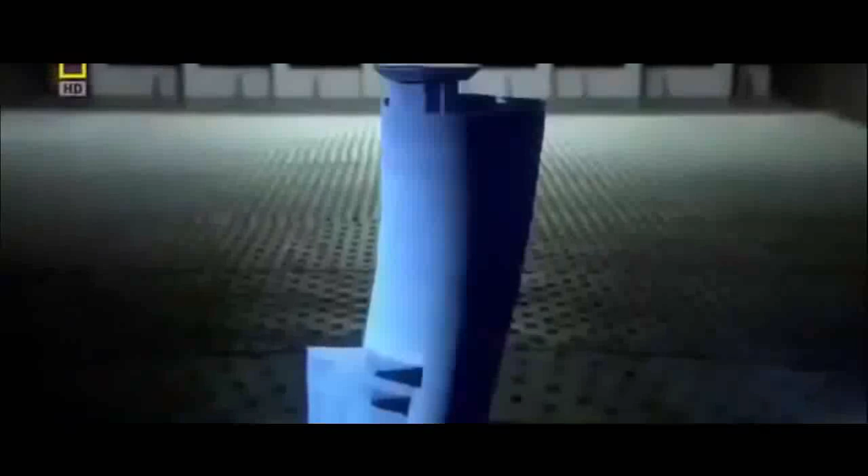To make the helipad safe, Aurelius and his team have to go against conventional thinking. We didn't think that lowering the helipad was actually going to be the optimum design, but we see reduced loading on the helipad as well as safer conditions for the pilots to land in. Lowering the helideck to just 2 meters above the roof dramatically decreases the wind shear threat, and means Capital Gate's core will withstand the additional loads.

We're relieved, frankly. The tests have actually confirmed now that we can have it in our original design position, which is very low, which will mean that the profile on the skyline is exactly where we want it. But it'll take another 5 months to just draw up the helipad's blueprints, and a crane must be left behind to build it.

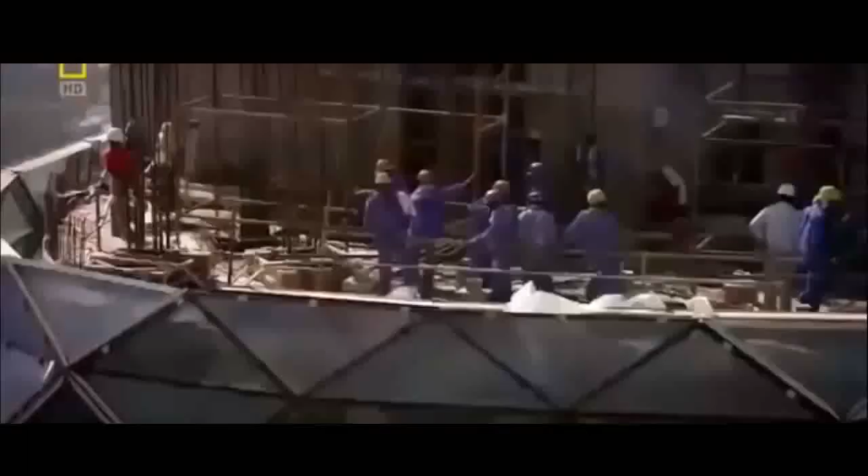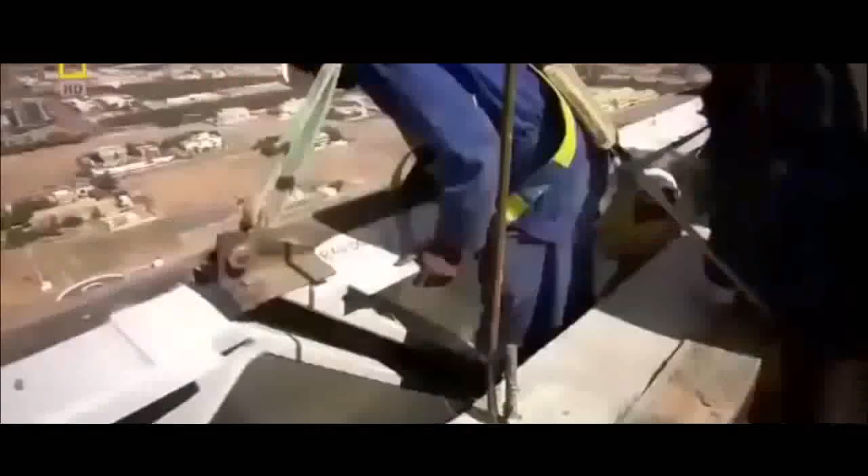Now, with only weeks to go until 0 hour, the team are installing one of the last glass panels. It's a moment that once seemed a long way off. In my office I have a plan of all the diamonds we have to install, and in the beginning it looked like I'm in jail and I'm marking the wall with marks for each day. And so in the first time I felt I never will finish this project. Just 10 months since the first diamond was fitted, the facade now shimmers in the sun.

Capital Gate's internal fit-out will take another year. Only then will its 5-star hotel and Abu Dhabi's most unusual office address be open for business. But against the odds, the team have created one of the most extraordinary megastructures on the planet. Capital Gate twists and spirals out of the ground, soaring to a full 162 meters. It's taken nearly 6 million man-hours to construct, and its overhang is spectacular.

You see the building and you stand underneath the overhang. It's extremely impressive. It's a fantastic feat of engineering. I feel as though I've been here an eternity, but it's probably been the quickest 2 years of my life. It's been an amazing journey, and we've learned so much. And actually, I think we've demonstrated that some things that looked impossible or even ridiculous were actually possible.

And Abu Dhabi's past will soon be physically linked to its future by a wave of steel that will rise over the grandstand and splash off the skyscraper's mirrored glass. Abu Dhabi is a fascinating part of the world to be at the moment. It says to people we can step outside of the box. We don't have to follow the rules.

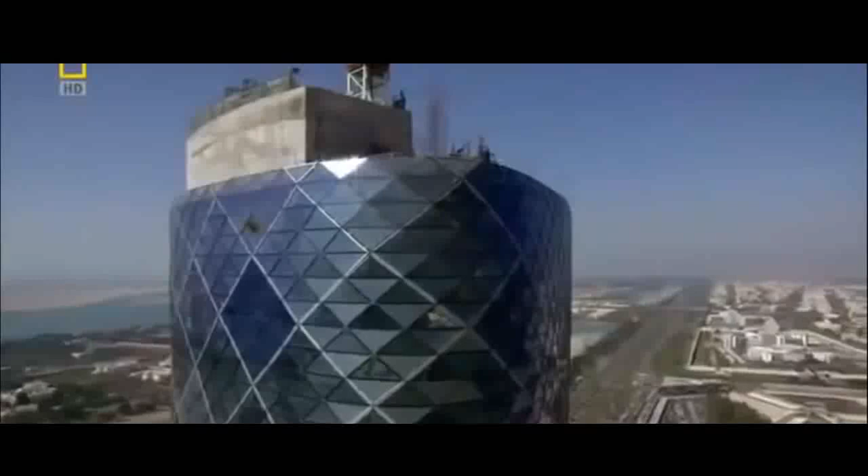With the 2010 World Future Energy Summit just weeks away, Sheikh Sultan can be sure Capital Gate will show the world what Abu Dhabi is capable of. This building is really iconic. It catches the spirit of Abu Dhabi and will be part of the postcard image of Abu Dhabi. The team have achieved what some thought was impossible. A leaning tower that claims the world record for the most inclined skyscraper on Earth.